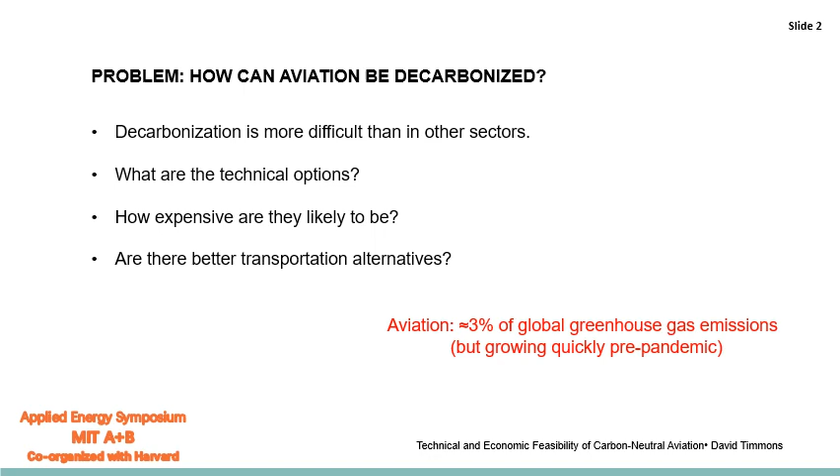While aviation only accounts for about 3% of global greenhouse gas emissions, it's a particularly difficult decarbonization problem compared to other sectors. So our questions are, what are the options, and especially how expensive are they likely to be? What are the economics of decarbonization?

In the literature, we find 5 paths discussed for carbon neutral air travel. One is to use battery-powered electric planes, similar to battery cars. A second one is to make synthetic kerosene from biomass that closely resembles current jet fuel. A third one is to keep using fossil kerosene, but to remove the CO2 someplace else and put it in the ground to sequester it. A fourth one is to use hydrogen as a fuel, and a fifth one is to make synthetic kerosene with carbon monoxide and H2, both of which could be made from renewable electricity.

In this study, we don't consider battery planes. We don't find much evidence that these are likely to take the place of aviation in the long haul routes, which are the places where aviation is most critical, in the transatlantic routes, for example.

And we don't include biomass because biomass is the easiest solution for every energy problem. It's the most similar to fossil fuels that we use now, but there just isn't enough of it. And so it's hard to conclude that this is an option without also looking at all the other things that biomass might be used for. So in this study, we consider only the final 3 options on the list.

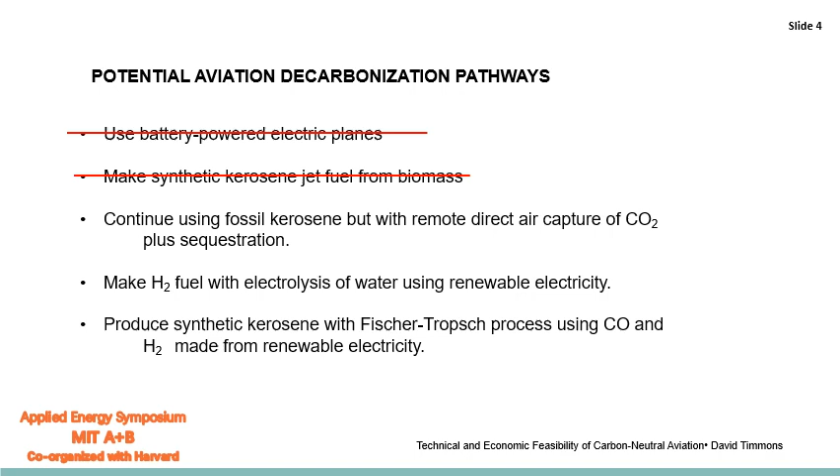For the first path, airplanes would continue to emit CO2 as usual, just into the atmosphere. And then at some convenient spot on Earth, the CO2 would be recaptured, liquefied, and pumped into underground geologic structures. If renewable electricity were used for the direct air capture and sequestration, this could, in principle, become a carbon neutral path. A problem with this pathway is that it's not completely sustainable.

The kerosene fossil fuel is, of course, a finite resource, so that would be used up over time. And the places where we might sequester carbon dioxide underground are also finite. So that's another resource that eventually would be used. And the more difficult places to sequester carbon would probably be more expensive than we have estimated here.

There are also some questions about CO2 leakage from underground reservoirs, whether this actually contains the carbon dioxide forever or simply for a period of time. And there's some other pollution problems associated with both creating the jet fuel and the emissions from the aircraft. So it's not a perfect solution, but it would be better than what we have now.

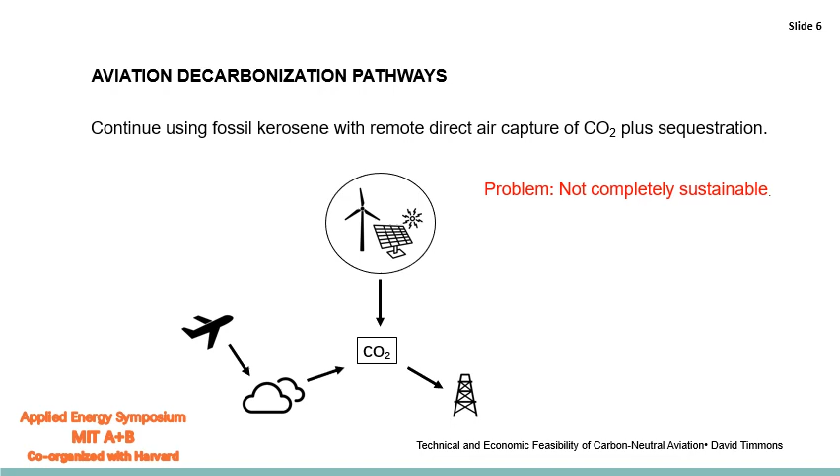The second path is to use renewable electricity to make hydrogen from water, which could be used directly as an airline fuel. A number of studies have been done on this path in terms of the density of the hydrogen fuel, the weight of fuel tanks that would be needed to contain liquid hydrogen on an airplane, and so forth. And it seems clear that this is a feasible pathway.

A problem is that there are, to our knowledge, no examples today of hydrogen-fueled planes, which means that we're probably decades away from being able to actually implement this on a wide scale, given how long it takes to develop new aircraft designs, test them for safety, and all those sorts of things. So this seems like a long-term option, but it's clearly not an immediate one.

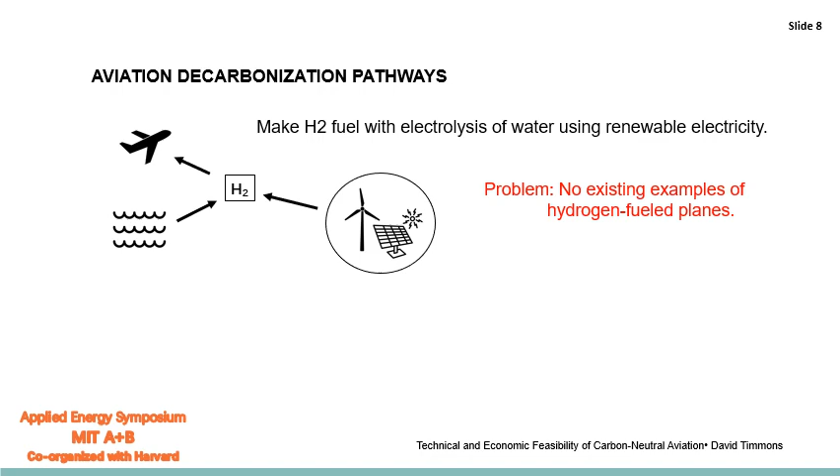The third path is the most complicated one and the one that we spent the most time on. The attraction of making kerosene with the Fischer-Tropsch process is that it would very closely resemble current jet fuel, so that aircraft and aircraft engines would not necessarily need to be greatly modified to use it.

In order to make synthetic kerosene, CO2 would be captured from the atmosphere. It would then be converted to carbon monoxide, CO, in electrolysis. Hydrogen would similarly be split from water in electrolysis, and then the CO and the H2 get combined in the Fischer-Tropsch process to make the kerosene.

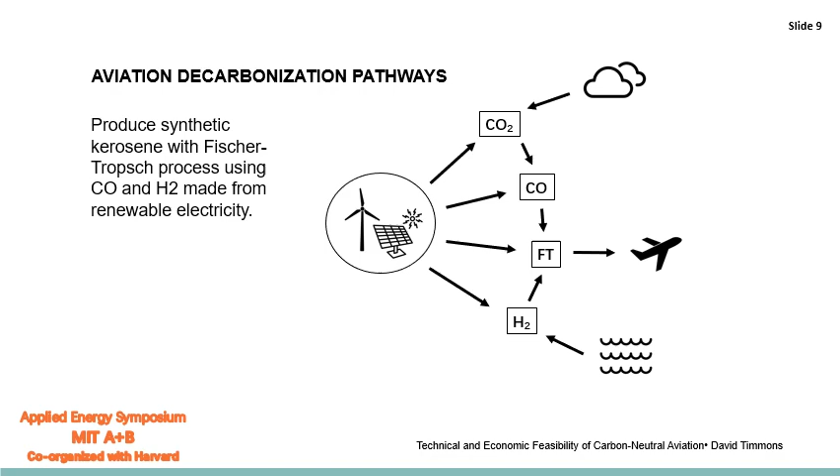Each of those four processes requires energy to do it, which of course would come from renewable electricity in a fully renewable carbon-free system. There are no problems that we're aware of with this particular path, except that it's complicated and, as you'll see, it's rather expensive. But from a sustainability perspective, this path seems to be the best one.

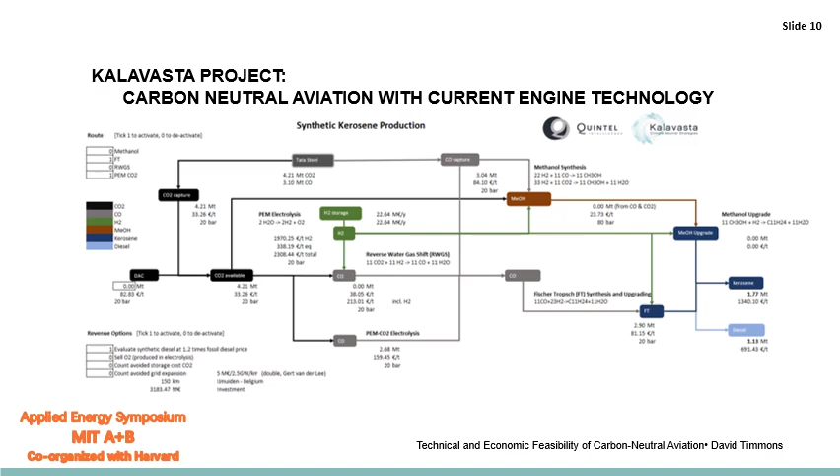The synthetic kerosene portion of this study builds on a previous study by Kalavasta of synthetic kerosene for aviation in the Netherlands based on a specific scenario there. Others have demonstrated the technical feasibility of the paths that we're considering in this study, so our main objective is to estimate the costs of aviation decarbonization. What we're presenting is our best estimate of what costs for these technologies might look like 10 years from now. So there's a large degree of uncertainty about costs, of course.

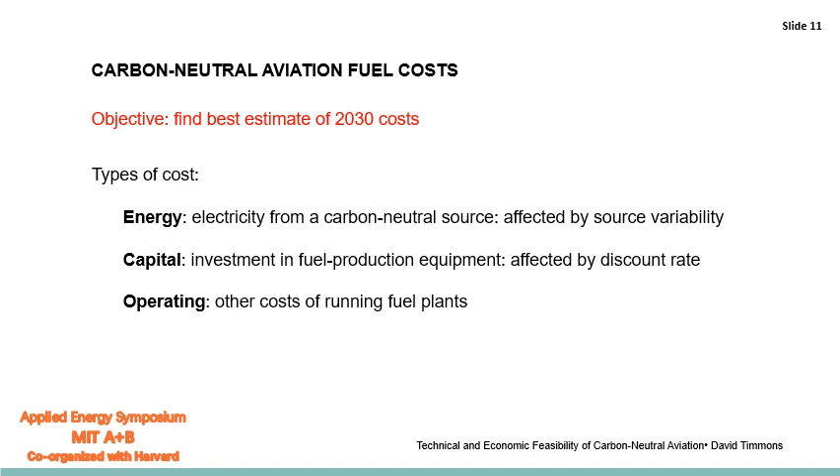There are three types of costs that we consider: energy from a renewable source, sources like solar and wind, which are variable and which affects costs, which I'll talk about in the next slide; capital costs for the investment in the facilities to produce the fuels; and operating costs. Most of the costs are energy and capital. The operating costs are fairly small.

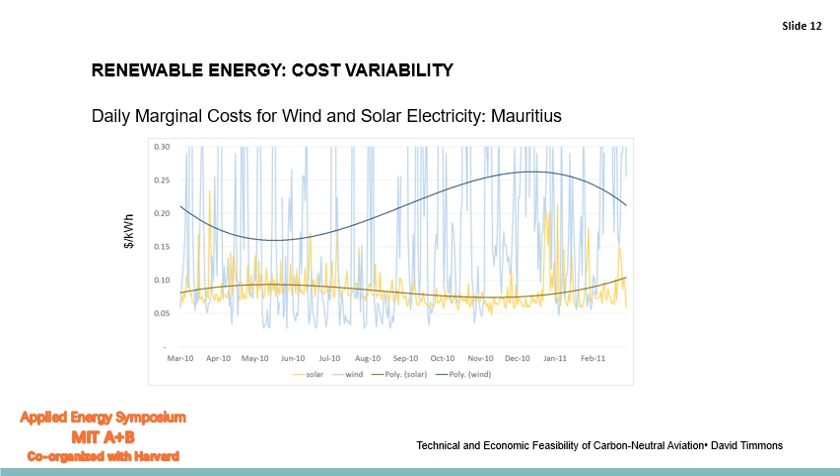The graph is from Mauritius, which is a tropical island that's relatively windy and sunny. And you can see that even in these good conditions, there's a tremendous amount of variability. And this results in costs that vary significantly over time. Under some circumstances, it's very expensive to deliver renewable energy, and in others not. In other conditions, the energy is quite available and therefore quite inexpensive.

In this study, we reflect this cost of renewable energy variability by presenting costs in three different scenarios. In the first scenario, we assume that a plant only runs 5,000 hours a year, 5,000 out of the 8,760 hours that are in a year. And given that a plant doesn't need to run all the time, if it can be a larger plant that requires more capital investment, but only run in conditions when the electricity is relatively available, then it can probably secure a low cost for the electricity that it uses. So scenario one, the plant only runs 5,000 hours and gets a price of 4 euro cents per kilowatt hour.

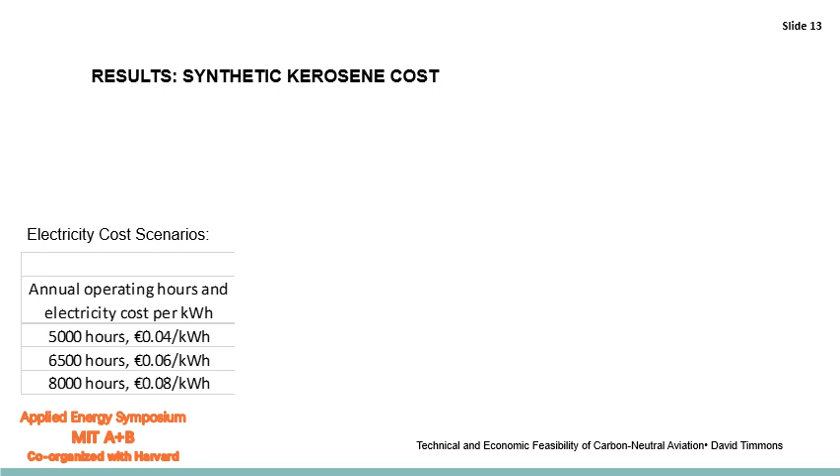In scenario two, we assume somewhat more operation, which results in a higher cost for the electricity because the plant requires electricity in more conditions, some of which will be expensive to deliver the electricity. And in the third scenario, we assume almost continuous operation, 8,000 hours a year, with the highest estimate for electricity costs. In addition, we consider three different discount rates for capital for the value that we assign to making the capital investment. And that results in a matrix of 9 different cost estimates for this kerosene jet fuel.

As I mentioned before, in these scenarios, there's a trade-off. In order to get the lower cost of electricity, it requires more capital investment, a larger plant size in order to produce the same amount of energy in fewer hours per year. Whereas if we have a plant that operates almost continuously, the plant can be smaller, the capital costs are lower, and the electricity rate is higher.

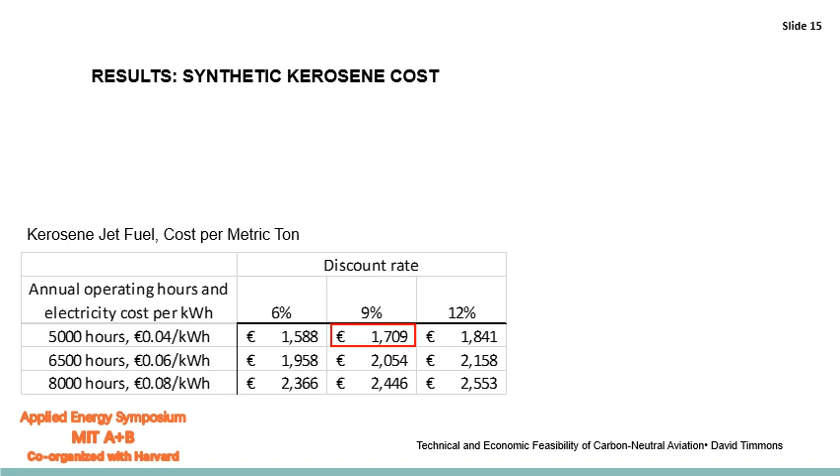So this is a complex problem, and you can imagine that actual results would vary depending on the circumstances of a particular plant. The highlighted box, 1,709 euros per metric ton of fuel, is what we consider our best estimate. I should say there's also some potential for additional cost reduction through storing some of the gases that are used in the process, but we have not included that possibility here.

So this suggests that there's some possibility for using gas storage, allowing some parts of the plant to run continuously, like the Fischer-Tropsch process, which has expensive equipment, and running the hydrogen electrolysis, for example, only when inexpensive electricity is available, and storing the hydrogen. And in fact, we have some models that look at that, but it gets more complicated. So here we've just assumed no storage and a certain number of hours a year with a certain kilowatt hour price.

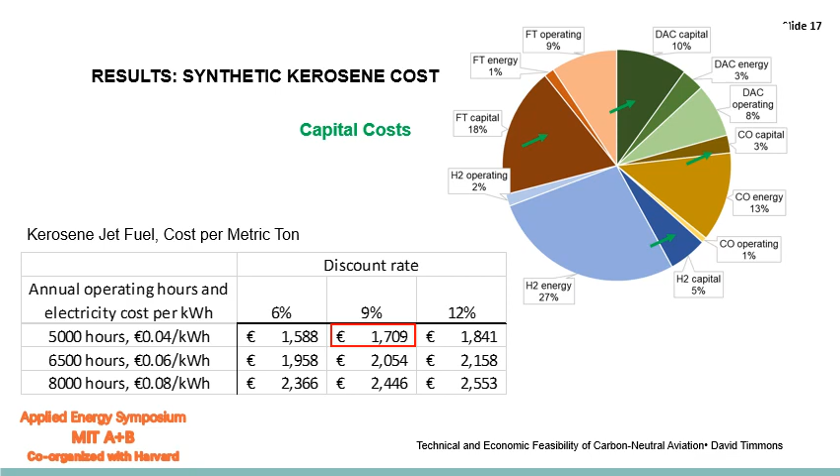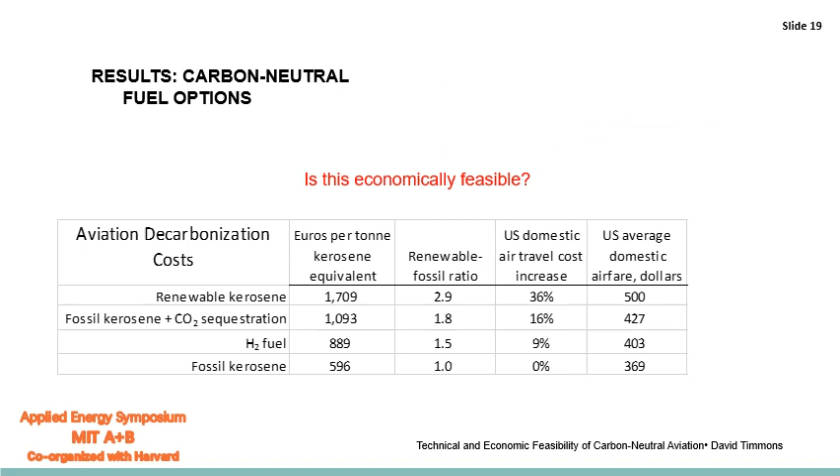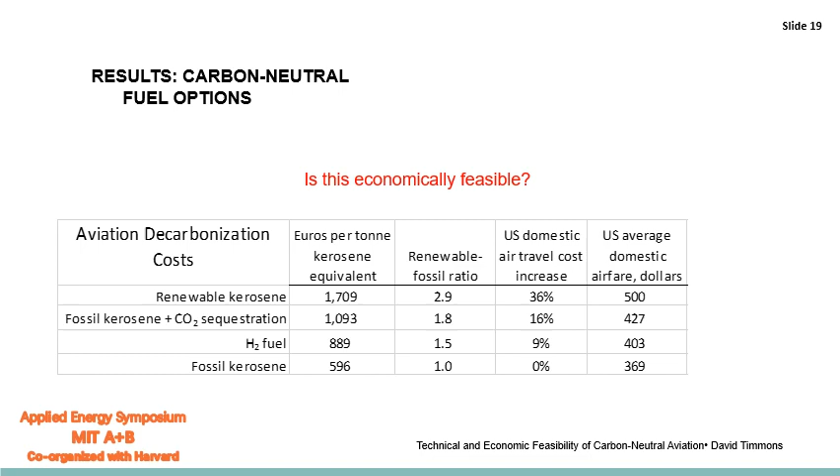Is this economically feasible is a question based on data that we have on the US domestic air travel price structure. The renewable kerosene option would increase the cost of travel by about 36%. So if you look on the bottom line, fossil kerosene now, we have an average domestic airfare of about $369. That would increase to $500 with renewable kerosene, it would increase to $427 with sequestration of fossil kerosene emissions, and to $403 with hydrogen fuel, again, including only the fuel.

Whether it's politically feasible is another question. It certainly represents additional costs beyond what it costs to operate with fossil fuel, but then the fossil fuel path doesn't address the climate change problem.

Given the cost difference between hydrogen fuel and renewable kerosene, our calculations based on cost of aircraft for the airlines is that the airlines could spend up to 285% more on hydrogen fueled aircraft. If the alternative were that they had to use renewable kerosene, it seems that it would be less expensive to develop hydrogen aircraft. We assume that for that amount of cost difference, airlines could in fact afford to develop hydrogen aircraft in the long term.

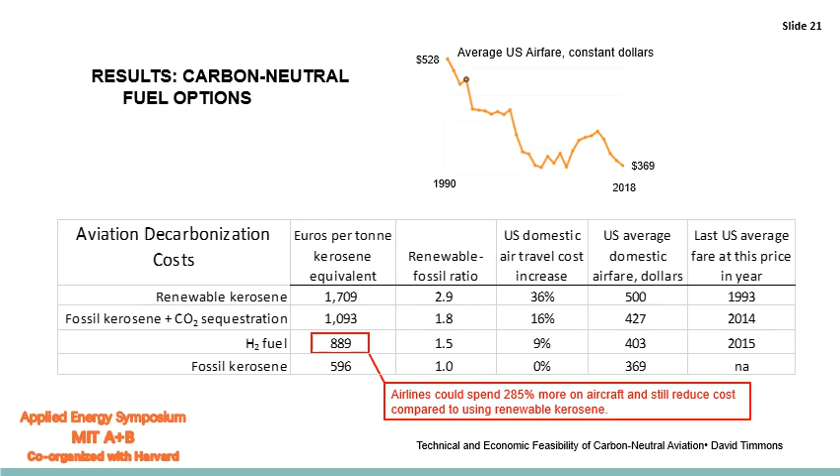So we conclude that airline decarbonization is both technically and economically feasible through any of the paths that we looked at. The least expensive path is continuing to use fossil kerosene with sequestration of the CO2 emissions, although that has some other questions about the sustainability of that practice. In the longer term, if hydrogen-fueled aircraft could be developed, that does appear to be the least expensive option. But there are also some questions about what the whole transportation system would look like.

As you can see from our previous graphs, we would be using renewable electricity in order to make the hydrogen that would then be burned in a jet engine. And the renewable electricity could be used directly to run an electric train or to run an electric car. There may also be some advantages of trains and cars in a post-COVID environment where people want more fresh air, people want more space between themselves. These are conditions that we find on trains and cars that we don't find in planes. So there's several things that perhaps point to a rethinking of the transportation system in general if it were to be based on renewable energy and if it were to be carbon neutral.